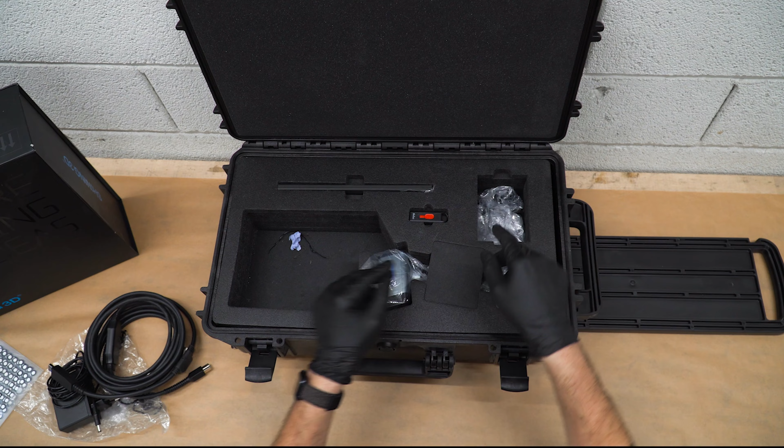We have a USB stick with the firmware on it. Here we have some markers, so you can get better scans or aligned scans. Here we have different plugs for the power adapter, so it depends where you're located, you can still use the scanner. And here we have the scanner.

I like that it has this thick foam in it. It protects the scanner when you're moving it around, or placing it inside of a car or something in the trunk. And here's the scanner.

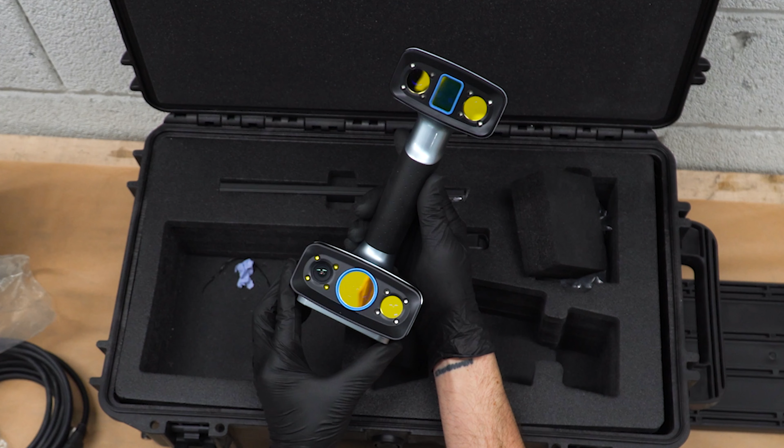It looks nice, and it's light also, so your arm doesn't get tired when you're making longer scans. It has 4 different cameras on the edges, and it has 4 LED lights on all 4 cameras. Here is the projector for rapid scan, and here is the laser projector. I like that it has this cool yellow finish on the surface of the lenses. I believe it's some sort of a filter.

It has 4 cameras that are surrounded by 4 LED lights each. It's called hybrid LED technology, which improves scanning quality because it has less impact on the ambient light. The scanner can see dark and reflective surfaces much better.

On this side, we have cables, power, and a trigger button. Here you can change the brightness of the scan and also a zoom button. I really like that they put a zoom button in here, so I can scan and change the distance of the scanned surface from my laptop.

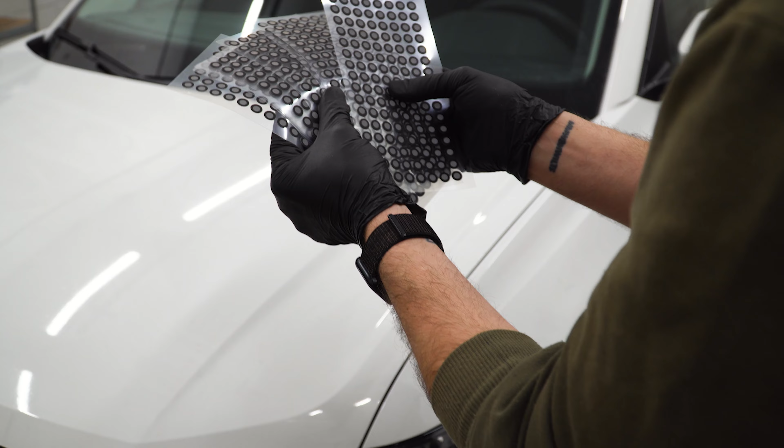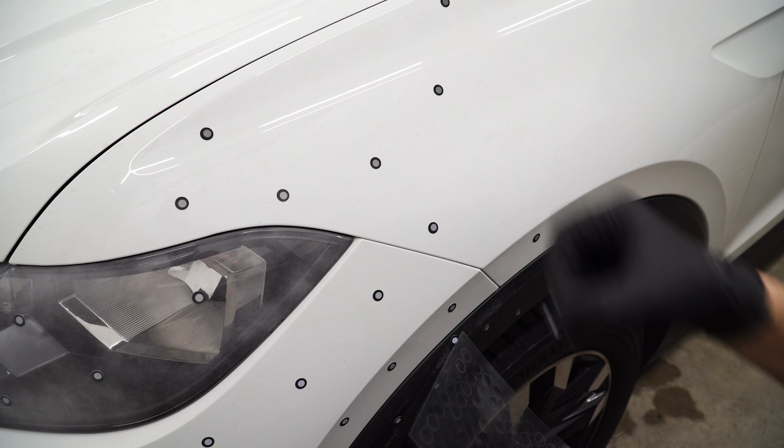So let's start with placing the markers, because we are going to try out the laser scan function in this video. These are the markers we are going to be using. We have a lot of them, we could scan many cars like this. We could also reuse them by removing them from the surface and putting them back on this plastic sheet.

So let's take one and let's start picking. It's better to do it without the glove, so I will remove it. The way you have to place these markers is randomly. You can't have the same position on this side and also on that side, because it might get confused.

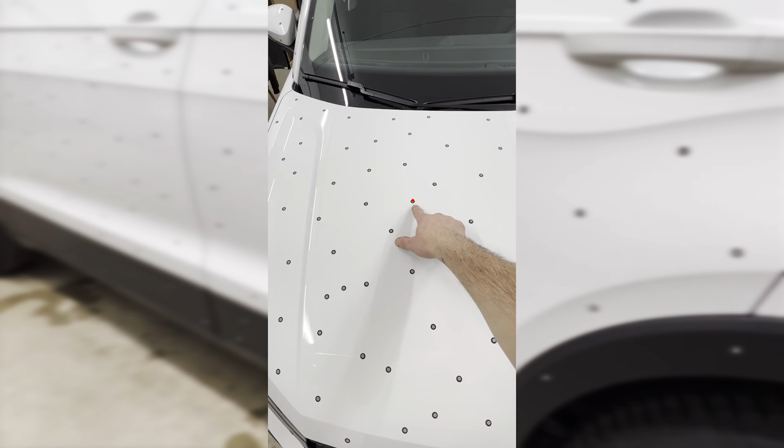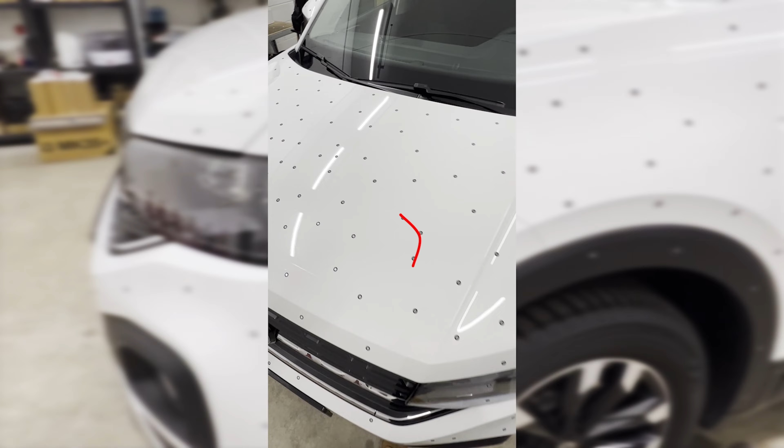In here we have many different textures and surfaces. This one is reflective, but also like glass or see-through. This is paint, and this is black. So let's see how the scanner handles it.

You don't want to place a marker right on the corner of the surface. I'll explain that later in the video, and then you can see what happens when I place it right on the corner. So now we have the markers on.

Let's continue with the software. In here we select laser scanning. We create a new project group, new folder.

The name new folder 3 is fine with me. And here we can check or choose what is the resolution of the scan. We're going to go with the medium scan, which is 0.5 millimeter.

So now it's ready. Let's pick up the scanner and try it out.

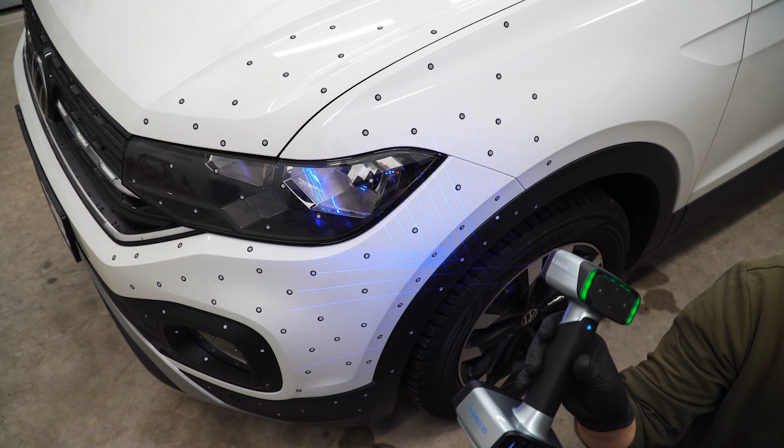So here you can see we scanned the front part of the car and something's missing. We are missing the light, and also the texture on the black surfaces is not really good, or not picked up by the scanner.

So what we can do about it is test different settings. We have reflective and black. Let's try out black first. When I'm using the black setting, the software changes some of the parameters so it can pick up this black surface much better.

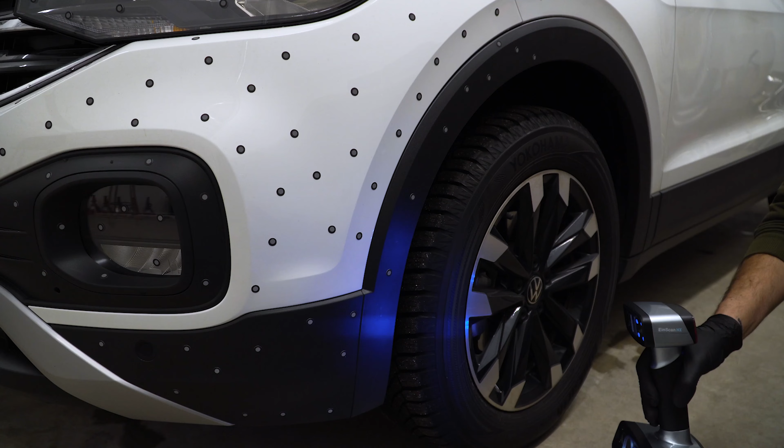Also, as you can see, when we get to the corner of the bumper, the scanner is losing its tracking.

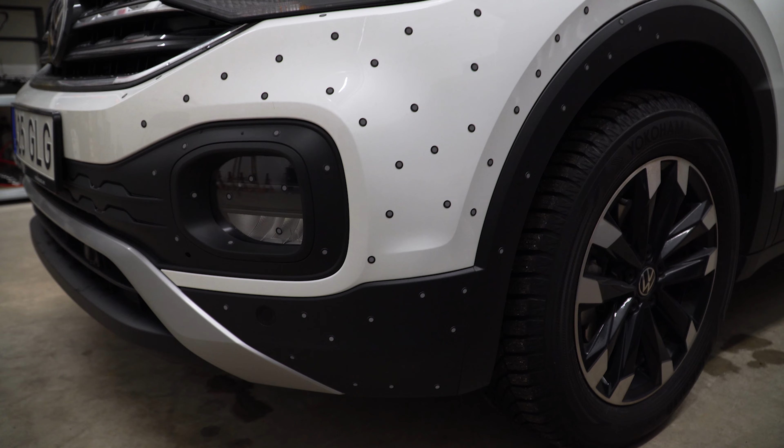So what we can do about it is first pause the scanner and then place some more markers on the bumper, because sometimes it's difficult to scan right on the corners because it might lose tracking. So what I would like to do on this corner is put some markers right on the inside. And now the scanner is not losing tracking.

So when we are done with the black surfaces, you could see that it's much smoother, and you can see it better.

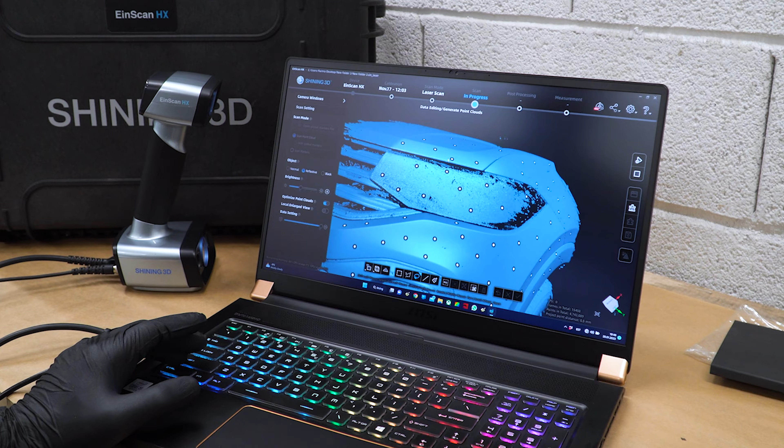So let's select the reflective setting. Now we use the reflective setting and the surface is much better, but as you can see, it missed something.

Glass is not a reflective material, but chrome is. Here when you look at these parts of the scan, on the car we have some reflective materials. You can see that it picked that up really nice.

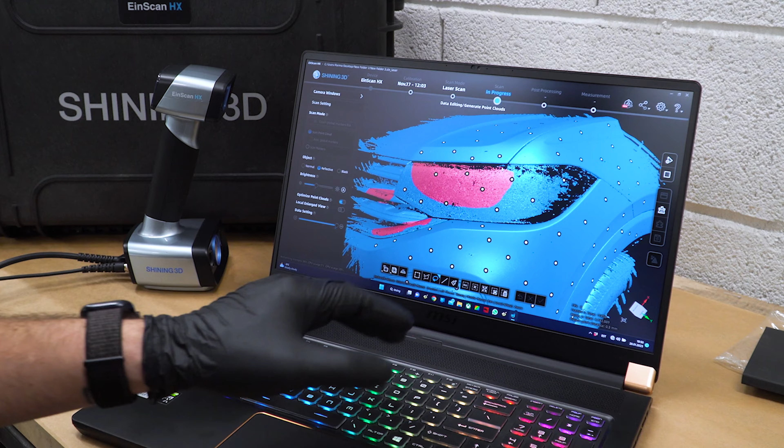But what can we do about this light? For now, I'm going to remove this surface again. We have to make this surface visible to the scanner somehow.

The reflective setting is perfect for, for example, chrome parts, wheels, basically anything that is a mirrored surface. On glasses or other see-through parts, we would need to use a different approach.

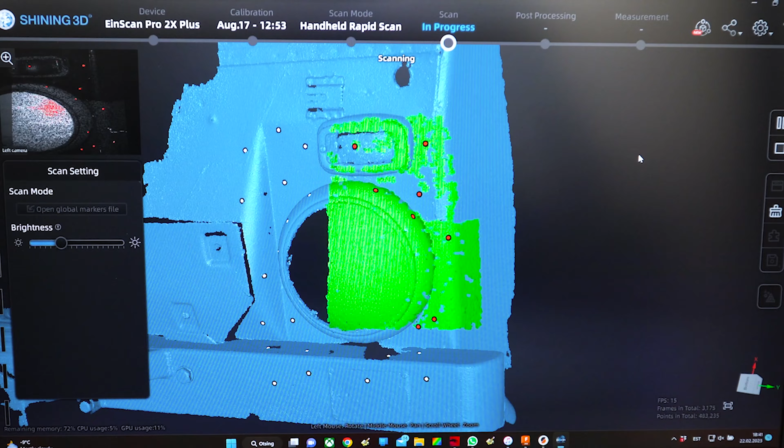One possibility is to use painter's tape. You can cover the lens with the tape, so the scanner picks up the surface from the tape. Or the second option is using scanning dust.

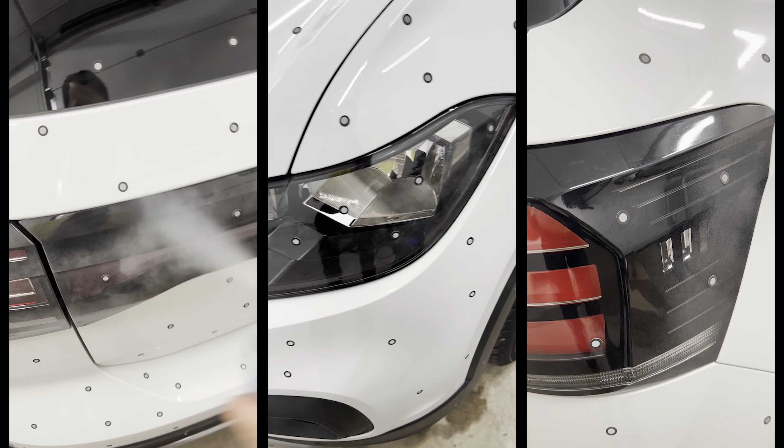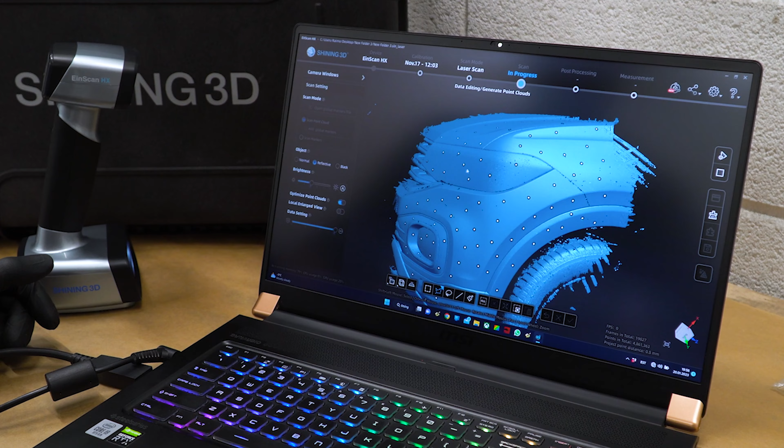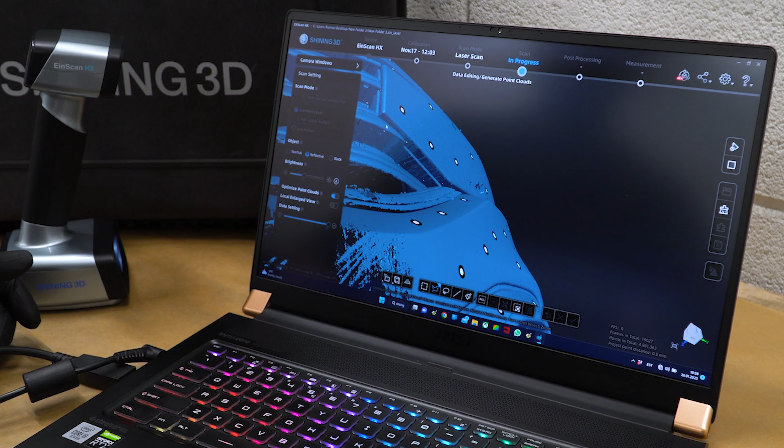Let's try out how the new method works. As you can see, this method worked out really well. The entire lens, on both lenses, was picked up really good. We have some scanning noise, like on top here, and we might go for another round for this edge, but we got the surface perfectly.

So now what we need to do is generate point clouds. Now that we have the scanner tested and we know what approach to use when scanning the rest of the car, let's start placing more markers to scan the entire car.

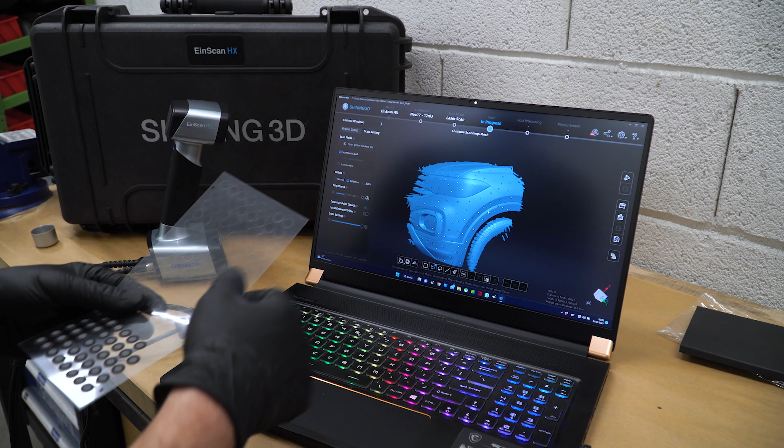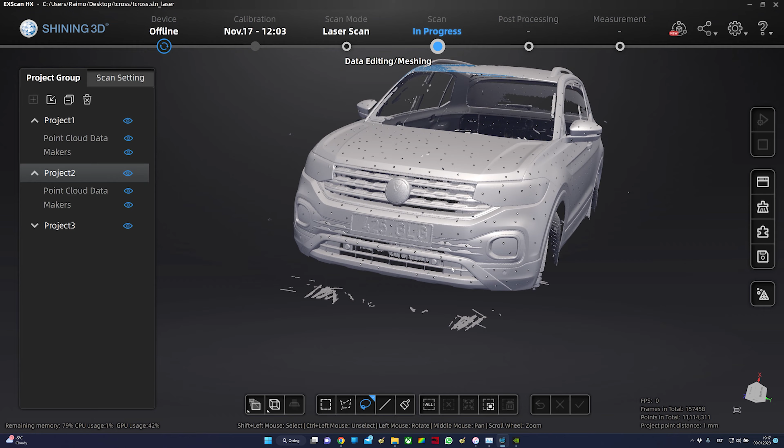We made a total of 3 scans to get all the surfaces I needed. The main scan was the biggest, and 2 other scans were taken from the front part of the roof where I could not reach the other side in one go. If you're scanning a large object or a car like this and want the best overlap when taking multiple scans, I'd suggest making the cut as close to the nearest edge as possible. Then align the scans with the help of markers, and you're done.

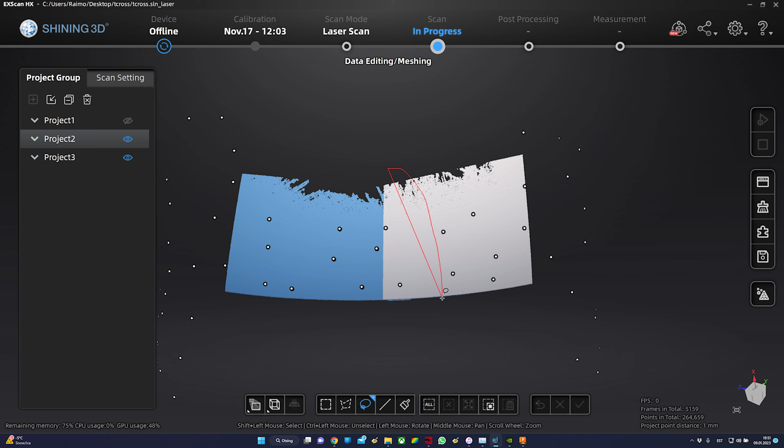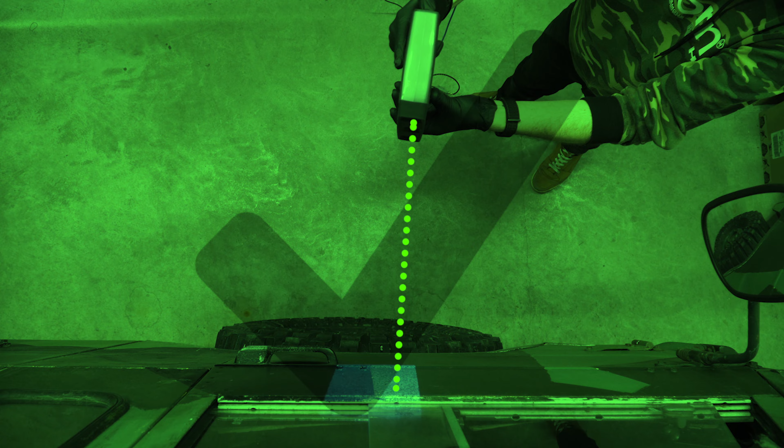I want to make sure scan data and alignments are correct with the previous scan to the main body. My goal is to end each scan or each stop at about 90 degrees of scanning angle in relation to the body. This way I can be sure the overlap of previous scans is minimal.

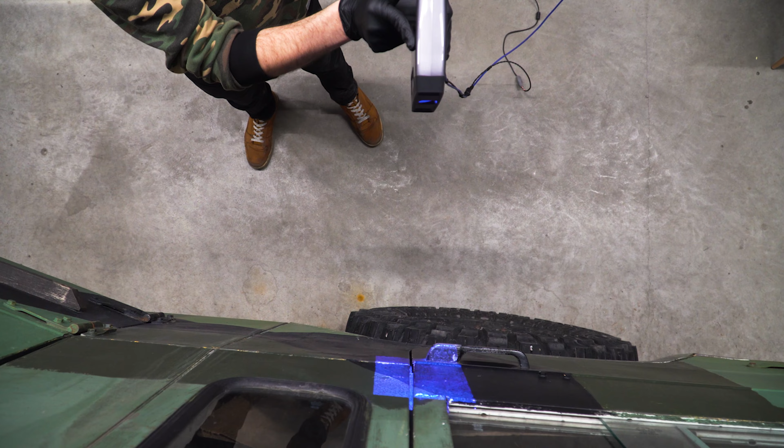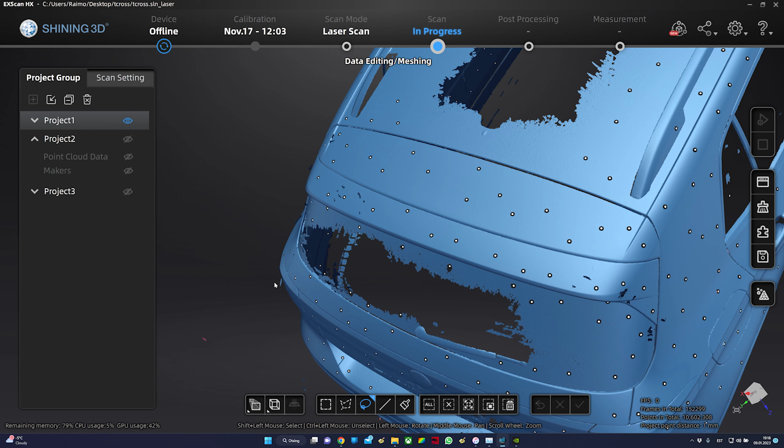Now we can go ahead and clean up the scan from the noise. You can see me doing it the hard way - rotating the scan and selecting areas I want to delete, holding Shift key and left button to go around areas like floor and tires and deleting them.

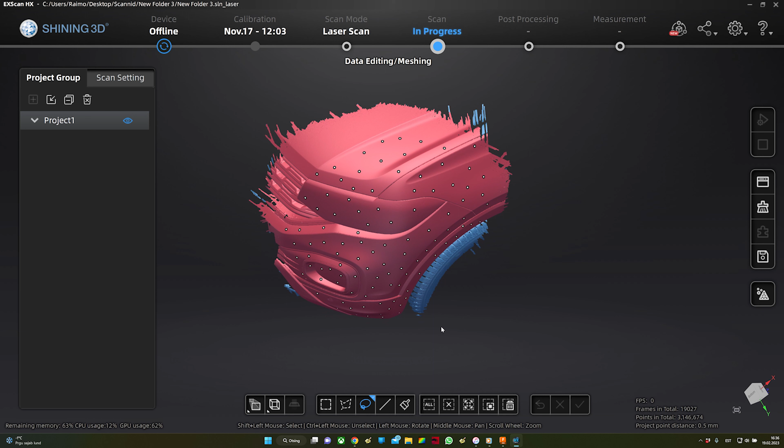The easier way is actually marking part of the scan I need, selecting connected domain. The software automatically marks all the data I need in red. After that, I need to go around the object and see if I missed something or some areas I might need later, for example this small area inside the grill.

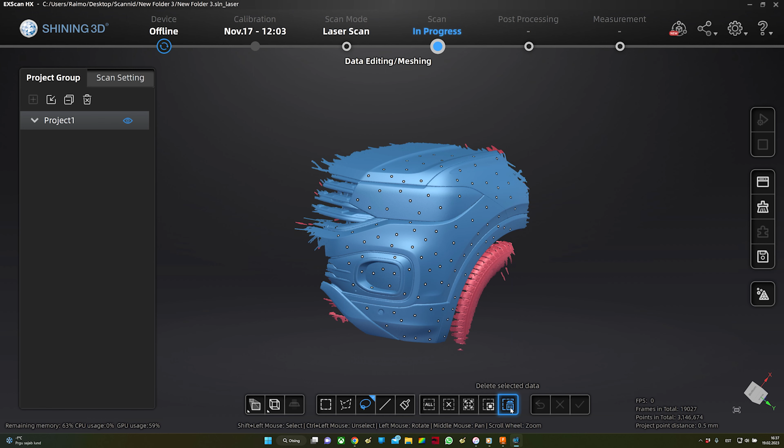After that, clicking invert. Now we marked all the areas that I don't need, like this tire and scanning noise. Then we hit delete and we are done.

A clean scan. When everything is cleaned and aligned, we are ready to make mesh data.

It might take some time, depending on how powerful your PC or laptop is. I would recommend getting as much memory as possible. At first I thought 16 gigs was enough. Then I realized I need 32, and soon after that, 64. So please don't make the mistake that I made. When you're buying memory, go with the maximum your processor can handle.

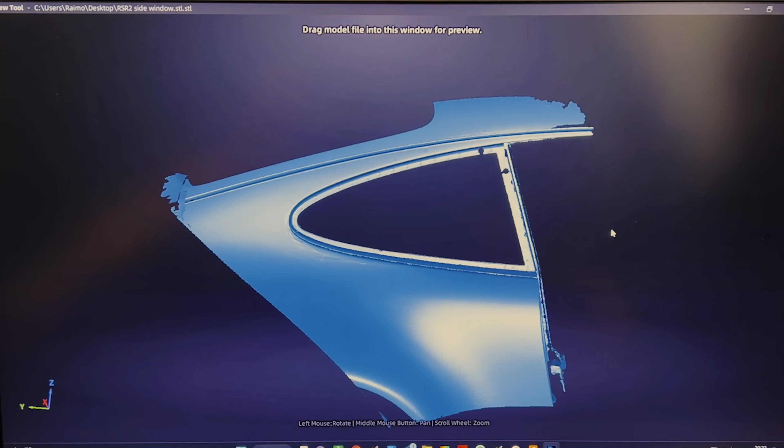Remember when we talked about placing markers right on the edge being a bad idea? Here is an example why I should not do that. As you can see, there are holes on the model where the markers used to be. When you start to generate the mesh, the software automatically cuts out markers, and when it's close to the edge, it doesn't have enough surface to fill in the hole.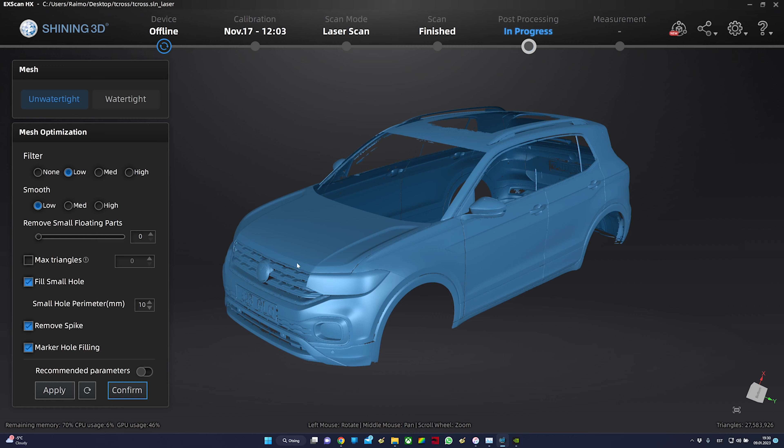When meshing is done, I would like to check the model again and see if there are any holes that need to be filled. For example, there are some holes on the right door. I select manual filling. Filling type is curvature because I want the holes to follow the curvature of the door.

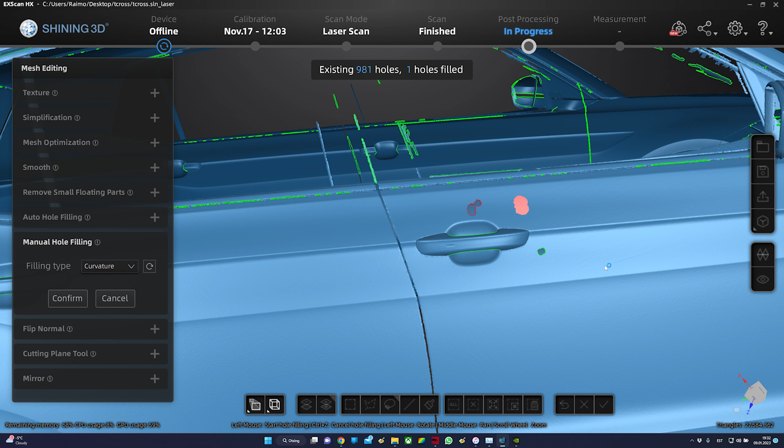Maybe some areas on the bumper too, but I don't mind when some areas are missing or have holes. I don't actually need those areas for my work - just trying out the software and the HX for my amusement.

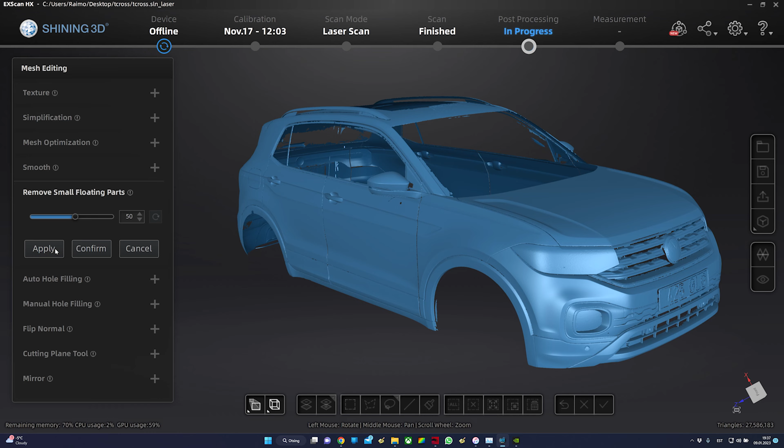Something else I like to do is remove small floating parts around the scan. We have an option for that too in the software. Click confirm if all is good.

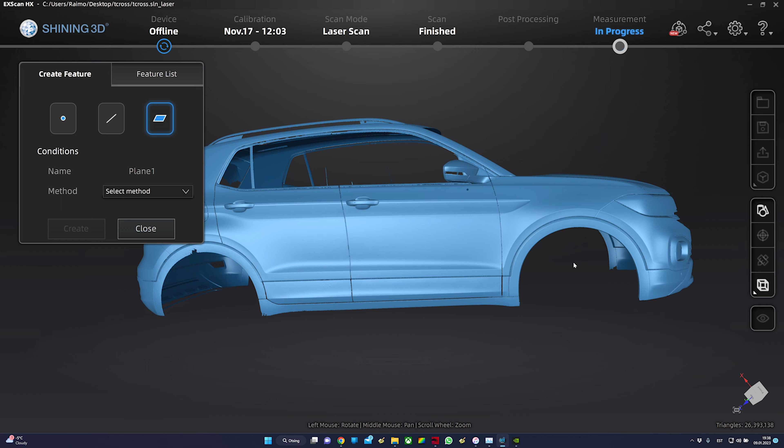Now we move on to the measurements where we try to align the scan. I select create feature, then try to find some flat planes from the surface. I think I will use the number plate for this one. I will pick 3 points, click create, then choose point to point on the right side of the car, and finally select a point on the bumper.

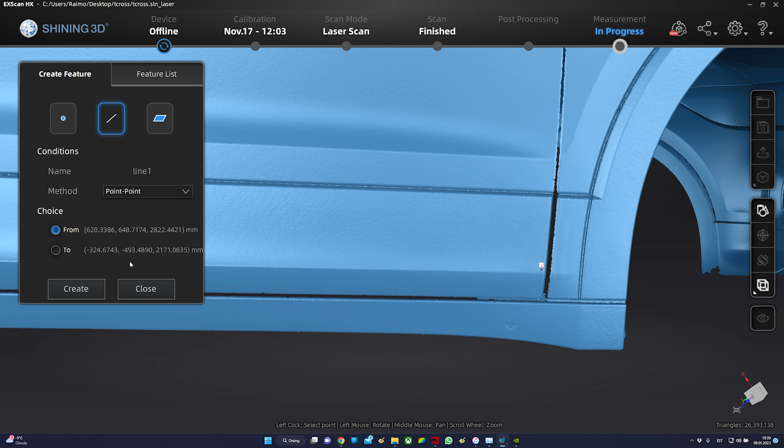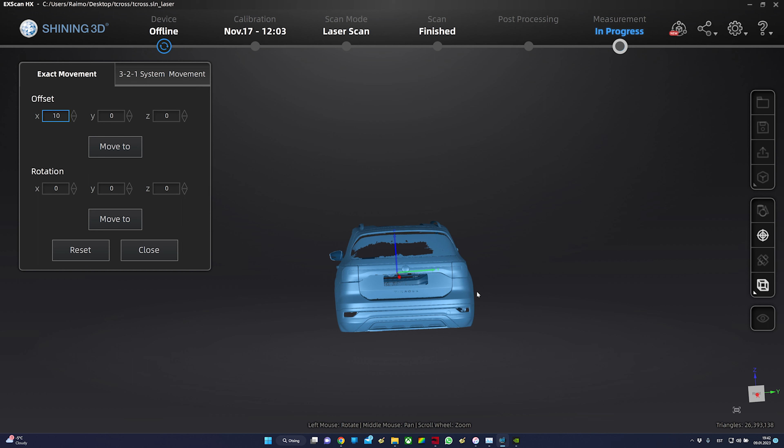Now we move on to the movement, selecting our plane, line and point from the menu, testing some different constraints, later adding some offset to get closer alignment, and later the model could be aligned to the scan data. I only need close enough alignment for this scan for now, but if your model has more flat surfaces with 90 degree offset, you should get perfect alignment using this method.

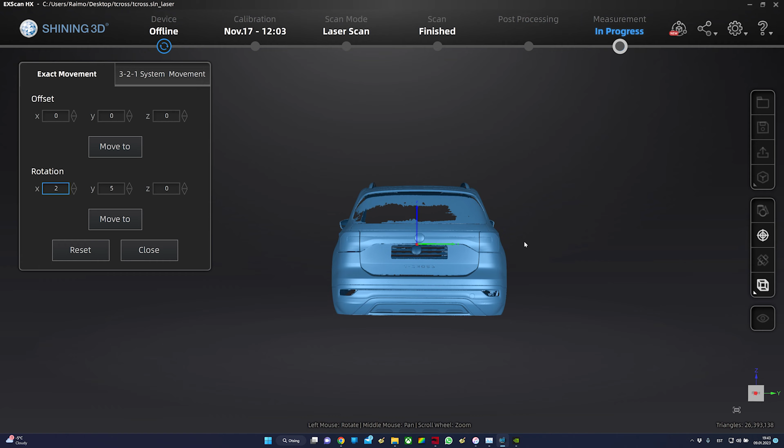We are done. Now, I only needed to scan this car for some design ideas for the roof rack and the additional high beam or LED light at the front. I might do another scan of the roof if I decide to fabricate a ski box or roof rack brackets, and the same goes for the front bumper.

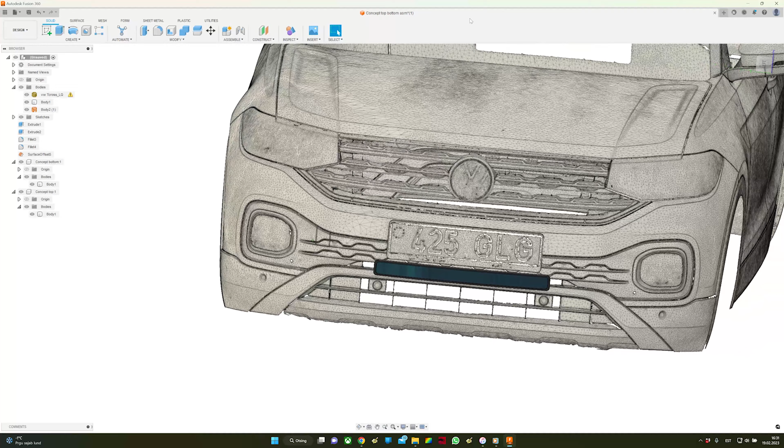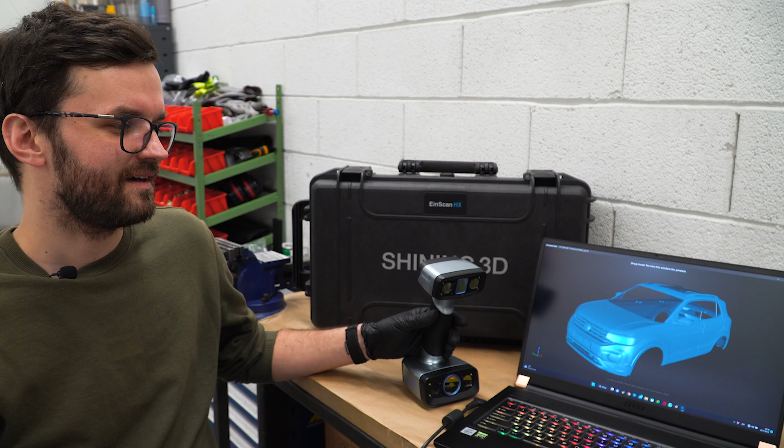And the scanning is done. I have all the surfaces I need to continue my work. It took about 3 hours to complete the scan, but I didn't need the windows, the roof, and the wheels. So if you plan to scan everything, it's going to take longer.

We cleaned the scanning noise. We made proper alignment of the scan and made both high and low resolution STL files for work.